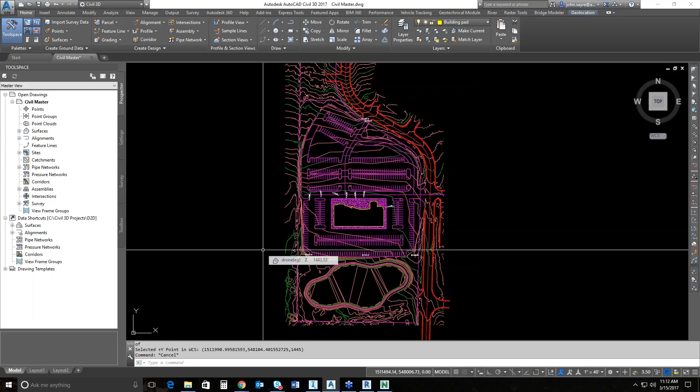So to start off, I want to tell you where you can go get this feature, because I have what's called a sit call every month for the inside folks here at Autodesk, and there were a lot of folks having problems finding this, and this kind of is how all of this got started. So I'm going to actually show you where you can get this. Everybody should be familiar with manage.autodesk.com. You would log in here with your Autodesk login.

All right, mine will be a little different. I go in a different way. So I will log in. Once you're logged in, this is where you'll be able to see all of the products that you can download, pretty much everything in the collection. But where they've got this, and I don't want to call it hidden, but where they've got this shared reference point feature located, is under product enhancements.

So it starts out here in all products and services. We're going to go to the quick link here, product enhancements. It's not just something that's going to show up in this list, okay? It's inside of a set of tools: the productivity tools for AutoCAD Civil 3D 2017. So in that set of enhancements, you not only find the Civil 3D file, but you also find the installer for Revit. You get the README, the installer for Civil 3D, and the installer for Revit.

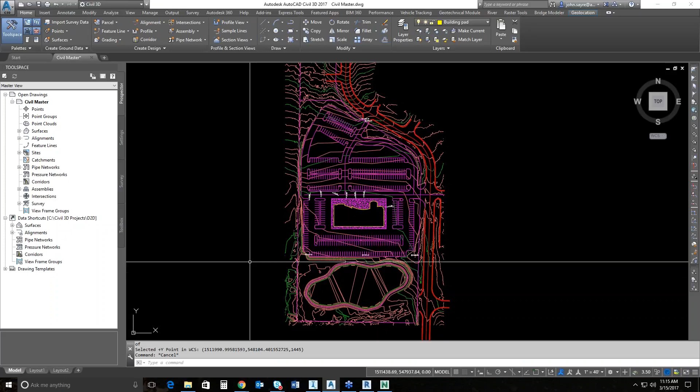So we'll go ahead and jump into Civil 3D. Just a little bit about this model. This is a model that we were actually building for this specific purpose, okay? And we were doing this actually before Eric asked me to come on and talk about this.

I was talking to him, and that's how this topic got brought up, and now we're doing the webcast on it. So we already had a lot of this done. This was actually flown with a drone for existing ground conditions capture. And so we took it through ReCap.

We brought in the point cloud, generated a surface, and then actually created a design surface on top of this so that we could marry up the Revit model to our finished design surface. So when we get to InfraWorks, we'll actually bring in the civil model itself, or the surface that you see here. This surface, if I select it, we'll bring this in, and then we'll also bring in the Revit model itself, and everything will be set up perfectly coordinates-wise.

So very first thing when we get started here, to find this command, once you've got it installed, you go to the toolbox, and under the Subscription Extension Manager, you'll see the Autodesk Shared Reference Point. Basically what this is going to do is create an XML file with your coordinates. We're going to tell it in Revit where to stick those coordinates, and then things start to match up.

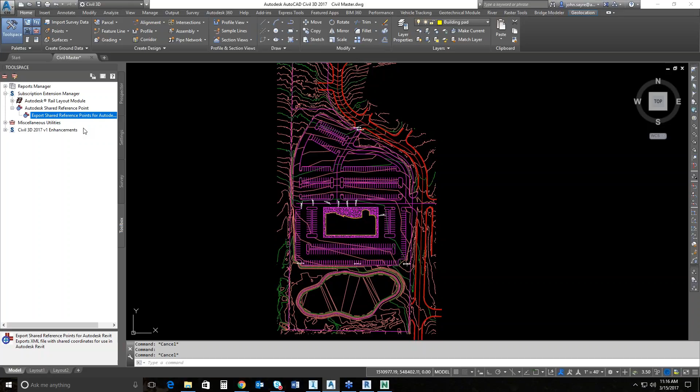So I'm just going to double-click on that command, and it asks me for an origin point. I'm going to do this a specific way today, but keep in mind how the building is oriented here on my screen. I went ahead and escaped out of that. I look at different things on the outline of the building that I can focus on in Revit. So this area here, it's pointing to the north. So when I get to Revit to actually add my shared coordinate, I can orient myself to that.

Now, one caveat here that you need to know, this outline is a polyline. It's just a polyline of the outside of the building, and if you list that polyline, it has elevation set to it. So this is the finished floor elevation that I'm going to set to my building.

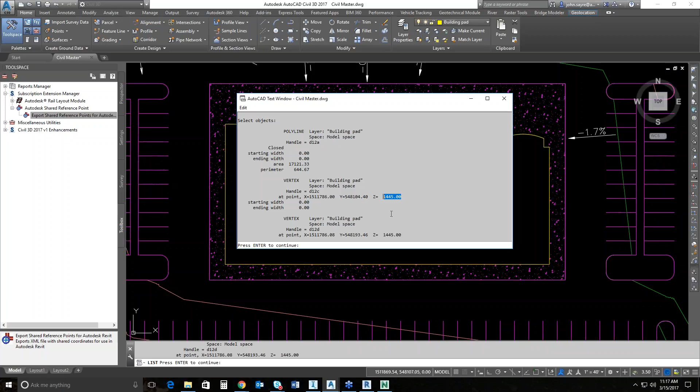Now, through several trials, I tried to add a finished floor that had multiple elevations. So meaning if I'm at 1445 on this corner, and maybe I needed to be at 1447 on this corner, I wanted to set the polyline up like that. You can't. It's got to be one elevation, as far as I can see, and I've verified that with a couple people. So it does need to be one elevation on the polyline. So I thought that was definitely warranted bringing up.

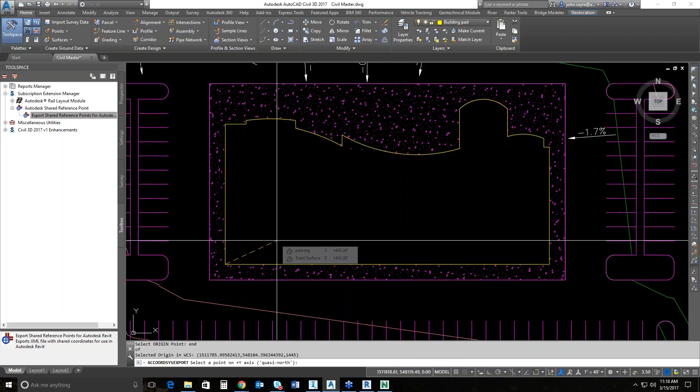So I'm going to double-click here again, and we're going to start by selecting an origin point. I'm going to pick my origin point as being this corner, and then we'll pick our next point as being this corner of the building. So keep in mind where things are oriented as to what's here on the screen. So I'm just going to select the end point, and it says to select my next point. I'm going to select here, and it brings up my units and confirm dialog.

Now, this is kind of a red flag: if this comes up and this says 0, you need to go back and set an elevation. If it comes up 0, you'll be in the right place X, Y, but you will not have the correct vertical elevation when you start to bring these things in. So the building won't come in vertically at the right location. It'll be down below wherever you're at. So be sure that it has the right elevation here.

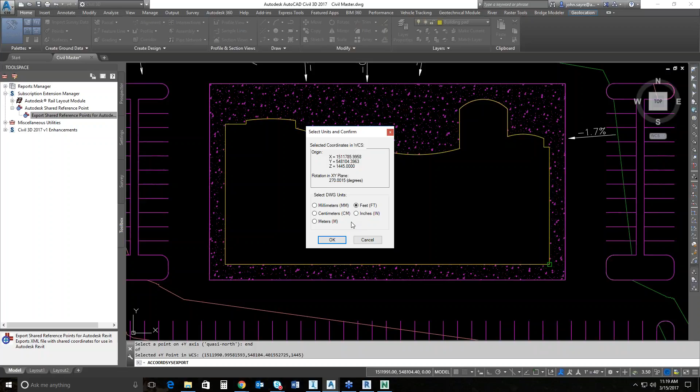We want to tell it that this is in feet, not meters, for this particular data set. And you hit OK. Once you hit OK, we're going to share this out. And I'm going to build a folder and call it shared reference point XML. And we'll save it out there. So you can name this file whatever you'd like. I'll just leave it this name and hit save.

Now, once you've done that, that's basically all you have to do in Civil 3D. We're ready to jump into Revit. So we're going to flip over here to Revit.

Now, from what I was describing earlier, this area right here is the area that's out front. So this line is how I set my shared referencing. So you can see the building's basically turned 180 degrees. So this area here needs to be rotated to where it's pointing this direction, to match up with our civil model. So don't do like I did the first time I did this. You gotta actually select it in the right direction.

And remember, we selected this going from the left to right. Well, in the Revit model, that's right to left because it's rotated 180 degrees. These are just a few little things I want to throw out as I go so that whenever you do it, hopefully it helps you from making the mistakes that I've made.

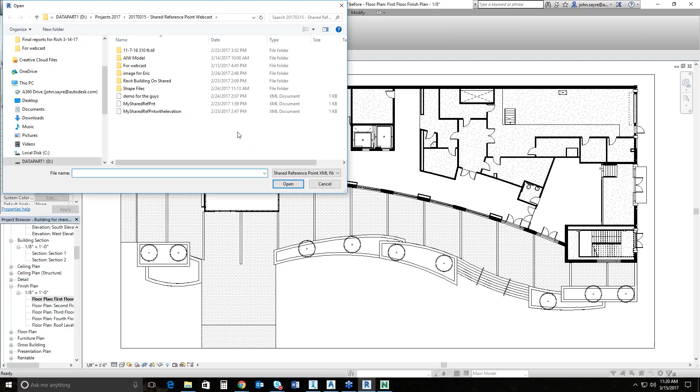Now it's asking me for the shared reference point file, and I'm going to use the one that we just got through exporting. It's in this folder. I select it and hit open. Now it's asking me to confirm, are you sure you want to create the shared coordinates? Yes. And it says I was successful.

Now, nothing happened. And this is where a lot of folks just stopped because, again, if you're an infrastructure person, you're not necessarily a Revit expert. So you're not sure about how to set orientation, how to manage views, things of that nature. So we look at the Revit model and, well, shoot, it didn't rotate. So there's a couple of extra steps. They're very straightforward and simple.

If we go to the Manage tab, this is where we can actually manage the location. So if I select Location and I look at my Site tab, you can see that there is a shared reference. This is my shared reference point. The view that it's looking at now, the definition of how it's rotated and everything, is set to that internal location. If I wanted to reference my shared reference point, then I just pick my shared reference point project location and I make it current.

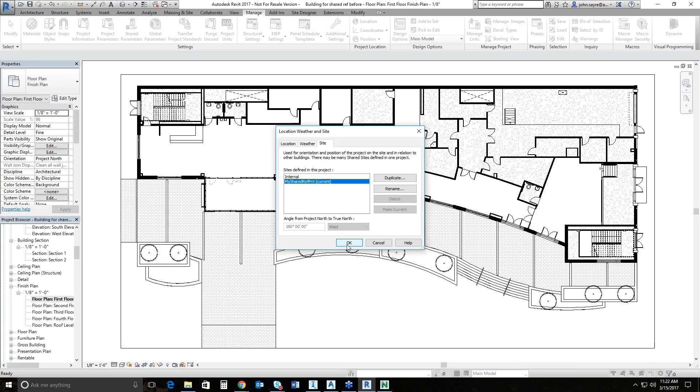And it's going to do some calculating here and it's going to make this current in this dialog. So now my project is set to my shared reference point coordinates. I hit OK. Nothing happened. There's one more step. And again, you'll get to where you do this all the time and forget this step and want to bang your head on the wall.

But if you look here on orientation in my properties dialog, it's set to Project North. Project North is the direction that Revit is wanting to look at it. So I'm going to select True North and hit Apply, and notice the building rotates. Okay, so now this Revit model is set to my correct location.

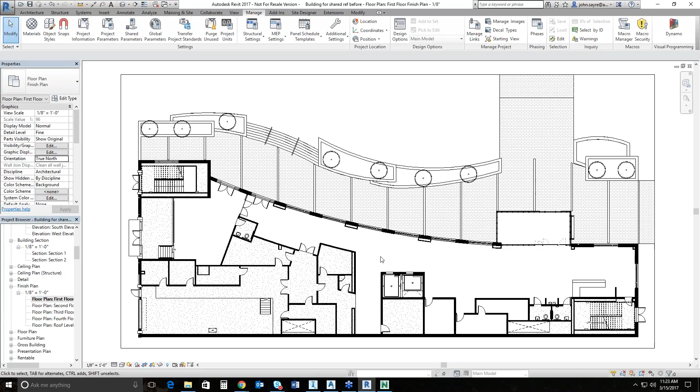Now, I want to prove it. And I'm always wanting to prove it. I had to prove it to myself, and I'm wanting to show you how you can prove it to yourself once you start doing this with your models. Basically, what I'm going to do is save this Revit model. I'm just going to do a save as, because I like to keep things separate. And I'm going to say this is my building, shared ref, webcast.

And I'll save it. So once it's saved, what I'm going to do real quick so you can see how it comes in Civil 3D is export out a 2D drawing of it. You can do that inside of Revit very quickly. If I go up to my Revit button and go down to Export and CAD Formats, I can export a DWG. One thing you need to remember when you select Export Setup, make sure it's not Honolulu, which, I don't know why it was Honolulu in this particular drawing, but it was.

You want to use the in-session export setup. And then I'm gonna look at those settings. So I can look at my units; this is set to inch, that's fine. Actually, I'm going to set it to foot, and I'm going to tell it I want it to use my shared coordinate system.

You definitely want to make sure this is set that way, because if you don't, then it's not going to come in the right location. All right? So I hit, and yeah, I'm pretty sure. I don't know why, but I'm second guessing myself on this, but I think I set this to foot earlier and it was fine. So I'm going to go to the Solids tab.

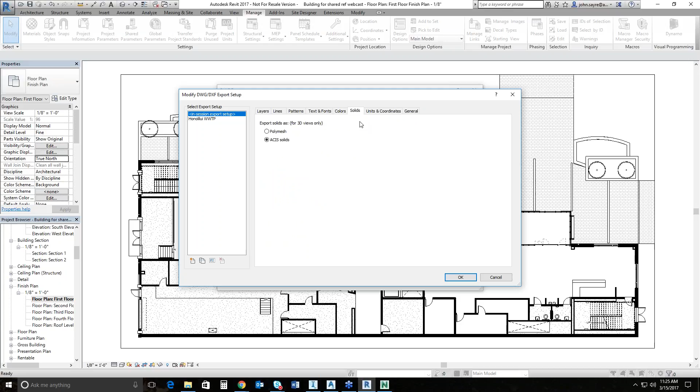The next thing you need to do so that we can export a 3D view is we want to be sure that this ACIS Solids is checked and not the Polymesh. Okay? Those are the only two tabs that we really need to worry about, and everything should come in correctly when we export. So if I hit OK, and then I hit Next, it's going to ask me where I want to put the drawing.

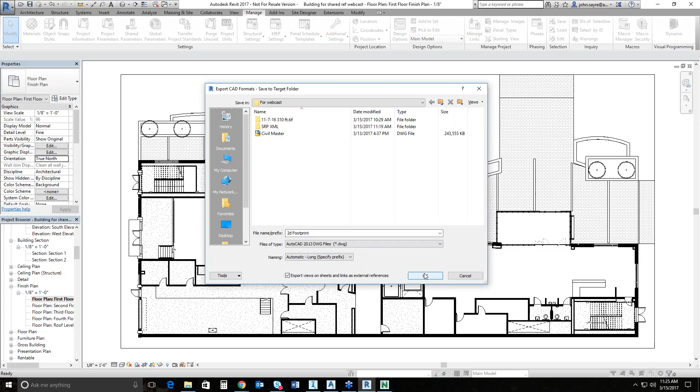I'm just going to call this 2D footprint. All right, and we'll leave everything automatic, and I will hit OK, and it will export that drawing out. And if we did everything correct, it should pop right in the exact location that it needs to. Keeping our fingers crossed here.

Quick question, so I'm John, back in Civil 3D. Yeah. So when you installed the shared reference point after you downloaded it from manage.autodesk.com, did that install it in both Civil 3D and Revit, or are those two separate downloads? They're two separate downloads. If you remember when I was pointing that out, here is where you download. There's two separate places. There's the shared reference point installer for Civil 3D, and then the shared reference point installer for Revit. Gotcha. Okay. Thank you.

This is year specific. So what I mean is this will not install on the 2016. You'll have to download the 2016 version of this, and it's out there. It's just under a different productivity pack. You'd find it in the same location that we found this. All right, good to go?

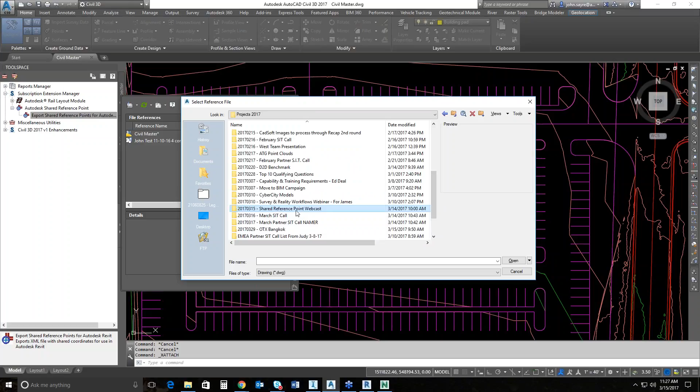Thanks, John. All right, so we have a drawing that's out there now. I'm just going to attach it as an XREF, all right? So if I get into my XREF manager and I attach that DWG that we exported, go to my D drive here, and I go to the right folder, and for Webcast, and here's my 2D footprint, okay?

I'm going to hit open, and I'm not going to select anything here. I'm going to have it come in the exact spot. I'm not going to tell it an insertion point, anything. I'm just going to hit OK, and voila. There it is, and it comes in the exact location. Now, this is a great sign. That means we actually set the coordinate system correctly, and it's in the right XY.

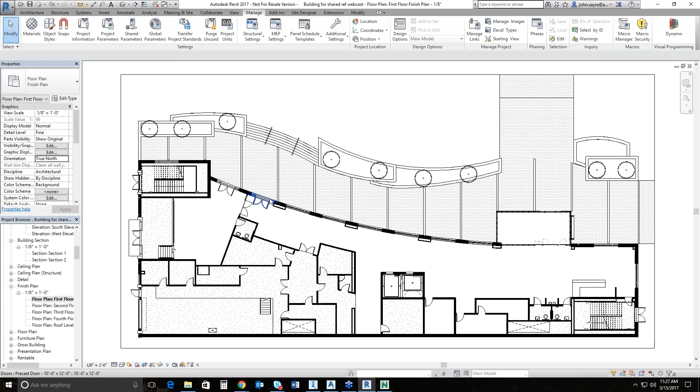We can see that, but we can't see if it's vertically in the right Z location, all right? But this is a great start. So we have a 2D export that we can start to have show up in our drawings. Let's go ahead and I'm going to remove that. I'll just detach it. And let's export one more thing here out of Revit. Let's go to a 3D model, all right?

You can see this Revit model is, I don't want to say heavy, but it is a bigger model. It's a multi-story building. There's some furniture and things of that nature in it. They've got MEP stuff inside of it. It's a good model. They built it specifically because they wanted that. They can do clash detection in Navisworks, things of that nature. So the model is a little heavier.

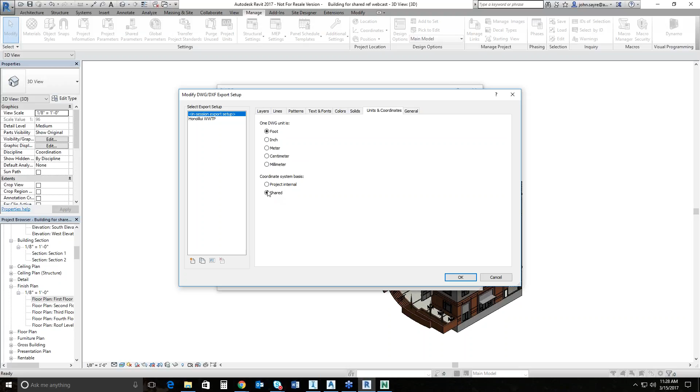But all I need to do is just go to a 3D model or a 3D view, and then I can export this out. So I can hit export, and export as a DWG. Again, and I know we just exported this out, but be sure that this in-session export is still what's selected. And I'm just going to quickly look and make sure that my units are still good. Foot and shared coordinate system, and then solids. Make sure that the ACIS solids is selected.

Then I'm going to go ahead and hit next, and it's going to ask me what I want to save. So I'm going to call this a 3D footprint, and hit OK, and it'll export that out. Now, it does take just a second to export it. The 3D model is a little bit heavier, a little bit bigger drawing whenever it exports. You will be able to see it 2D, so you could just export a 3D model, and it could maybe work for everything you're wanting to do.

I like the 2D model also because it's a smaller file that you're XREFing in, and we all know the lighter the files, the better things work. Get into an 80 meg drawing or an 80 meg Revit file and try to bring that in, you're going to be able to do it, but it's going to slow things down sometimes. It does take just a second to export.

One thing when I was doing this and setting all of this up, you notice down there in the lower left-hand corner, it's stuck at 36%. That's normal with this particular model. If it hangs for just a second, it's still thinking. You just got to let it go through its paces here.

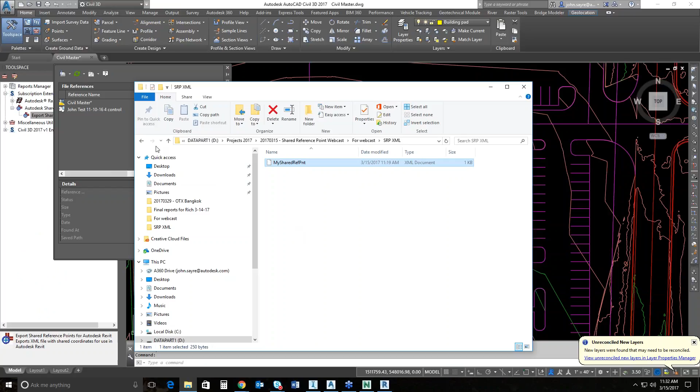All right, so we've exported our 3D model. Now I'm going to get back into Civil 3D, and remember I said something about it being a little bit of a heavier file, a bigger file. You can see that 3D footprint's 40 meg, and the 2D footprint was 272 kilobytes. So that's why I say, pick your poison - it's totally up to you which one of these you use. Sometimes we want to see that stuff in 3D in context inside of Civil 3D. It definitely helps you tell a story. So I wanted to show that you could do it.

So let's attach it. We will attach that DWG. I'll pick that 3D footprint, and I'll just hit OK. It's going to take a second to bring it in. And if we did things correctly, it should pop right in at the right location. I can tell you my processors are running wild, so we know that things are happening.

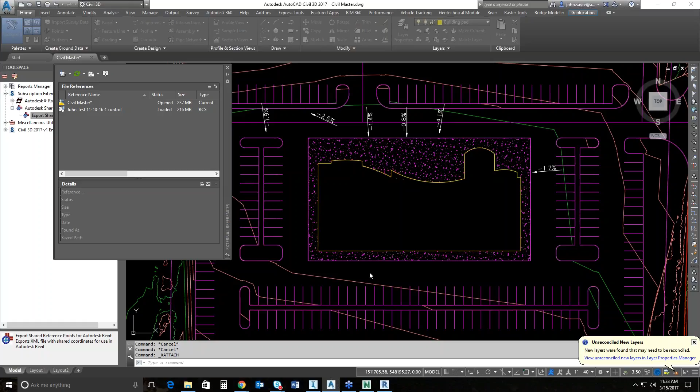When you're using the bigger models like this, I can't stress enough that you do need to try and stay patient. So there's your model. Now notice what it did do, and this is again why it's a little bit heavier of a DWG that it exports - you can see all of the information inside the building. This is for multiple floors, so that's why it's that much bigger.

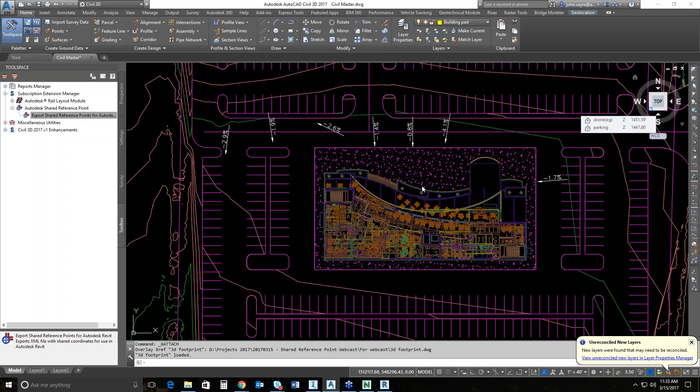Okay, so if I turn this on its edge and look at it in 3D now, it's going to take just a second. Once it gets to the initial view, it moves pretty good. Here we go, getting there. Should turn it on its side here. And we'll be able to see the 3D building, and there it is. You can see it right there, and you can see my surface.

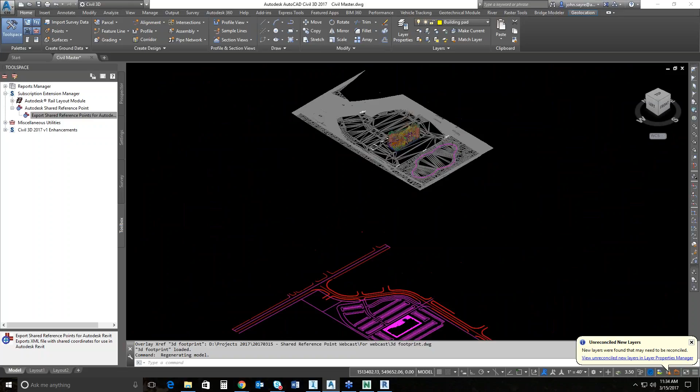It's regenerating here. There we go. So I can zoom in, and you can see that Revit model. So I'm trying to rotate it here. It's taking just a second. This is a very heavy Revit model, so that's why it's taking a little longer to react, but you can see I'm turning it pretty easily.

Once it's set, you can change your view style, your visualization style, and look at it any way you want. So it's looking at 2D wireframe. We can do realistic or conceptual. Let's just do conceptual, see what that looks like. But you get the picture. You can look at this in a 3D context inside of Civil 3D and actually see that footprint of the building.

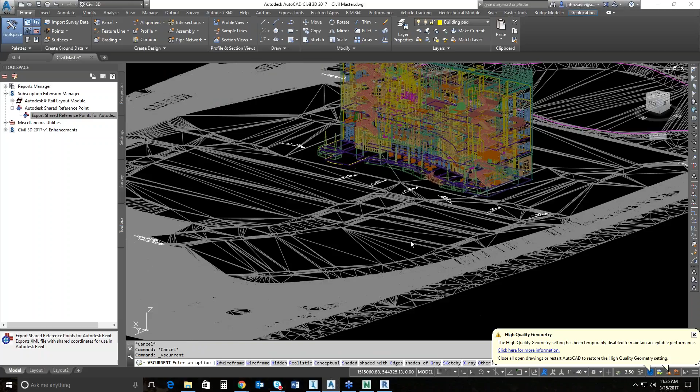Which I hope you agree with me, the steps to get to this point are very minimal. And that's why I was so happy to be able to bring this to you. So you can see everything looks great. All right.

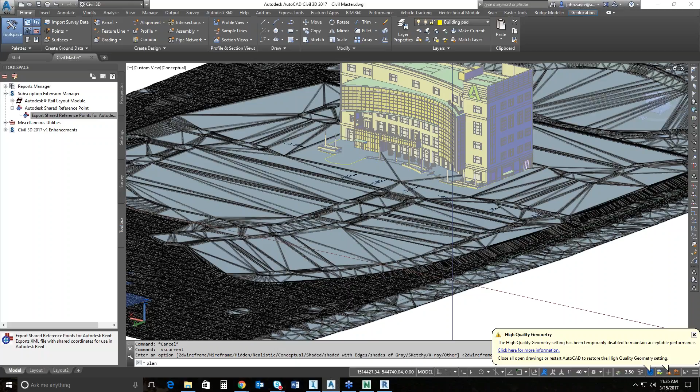So let's go back to our plan view. I'm going to take it just a second. All right, so I have this exported as DWGs. Let's do this. Let's go back into Revit. We want to talk about how we can get it into NavisWorks. So let's do this.

We already have what we need to get it into NavisWorks, but I can actually export out an NWC. This saves this scene as an NWC. So let's do that real quick and show you how we can start to look at this in Navis.

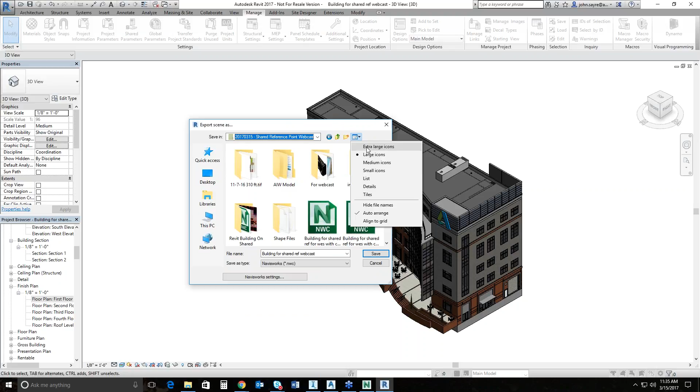So I'm going to go back one folder. Of course, my views are not the way I like them. And export this to my For webcast folder. So we'll just call this Revit Model. All right, and I'll hit Save. And it exports out that NWC. Okay?

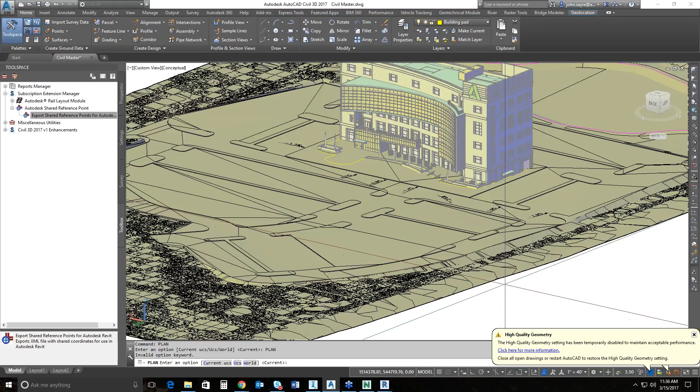While that's exporting, I can go back here to Civil 3D, and I needed to hit Enter one more time. And it should go back to my real world. Go back to a 2D wireframe, and everything should be good to go. I'm going to go ahead and I can leave that right there for right now.

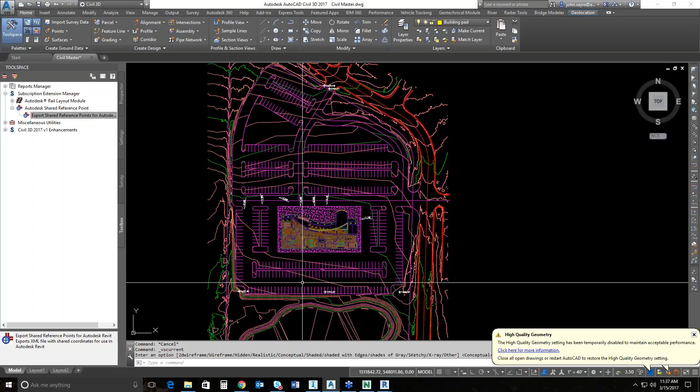Now, I'm sure there's a question about, well, what happens if the Revit model updates? You do have to, if they update the Revit model inside of Revit and it's on the shared coordinate, all they need to do in order for you to bring this back into Civil 3D is just export another 3D file. And then you can XREF the building right in. It looks exactly like what their edits would show. There's not a direct link to get that and make that happen automatically. You would have to re-export that.

So we should be getting really close. Yep, it's getting close. John, there was another question I'll throw at you if you want to take it.

A couple of people ask about the building site object and the ADSK format as a way of going between Revit and Civil 3D. Is there an advantage to doing the DWG export over that? I believe there is, because the file is, number one, I think it's more stable. The ADSK format, that was how we did it before we had shared reference point. So I think you definitely benefit from doing it the way that I've just shown over the ADSK format. Now, that's not to say that methodology doesn't work. I'm just saying this is much smoother. Does that help? Yeah, that's what we're looking for.

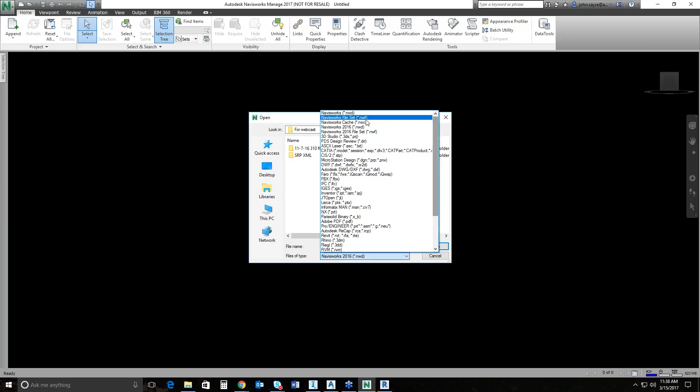Thanks. All right, so we're in Navisworks. I'm just going to open that file, that NWC that we just exported. And let me find NWC, John, not NWF. And I'll pick that Revit model, and it'll open up my Revit model.

Now, you're going to see some numbers here on the model itself. That's stuff that came exported from Revit. That's okay, you can turn that information off. But I can see my building as it looks in Revit right now.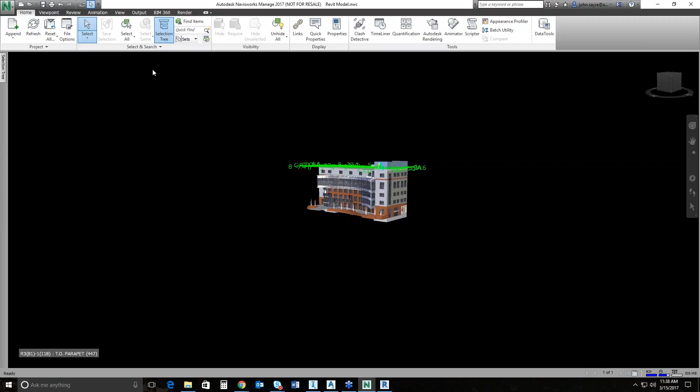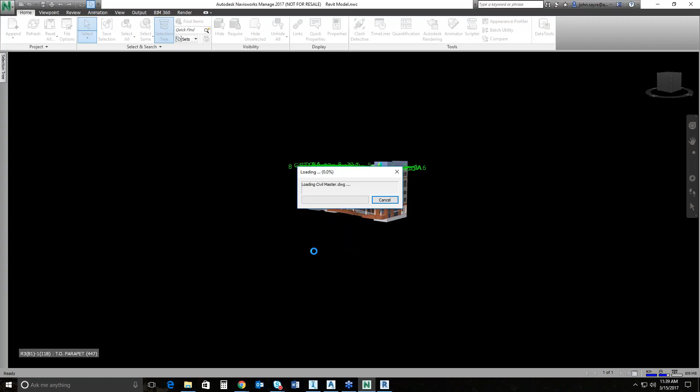Now, to get my civil model in, I can just append that DWG. So if I go back and set my file type to DWG, and I always have to scroll down, I apologize. Autodesk DWG. And I pick that civil master and hit open. It's going to bring in that civil master. It's going to take just a second, just because it's a large file due to the surface that was generated from the point cloud. So we'll let it go ahead and churn on that.

And while it's doing that, we're going to jump into InfraWorks. I hope I'm not jumping around on the products too much, but there's no reason for us to sit and watch this come in. We'll come back to it in just a second. But this is all you have to do, is just add this to it, and we'll have everything inside of NavisWorks the same as we do Revit and Civil 3D. So I'm going to jump to InfraWorks, and we're going to start this from scratch.

Okay, I'm going to build a model in Model Builder. I thought about using an existing model that I had already done, but I want you to see that this is all it takes to build.

This particular project is at 63 Truman Road, Marshfield, Missouri. If you didn't know, I live in Missouri. I don't live in Marshfield, it's about 50 miles away from me.

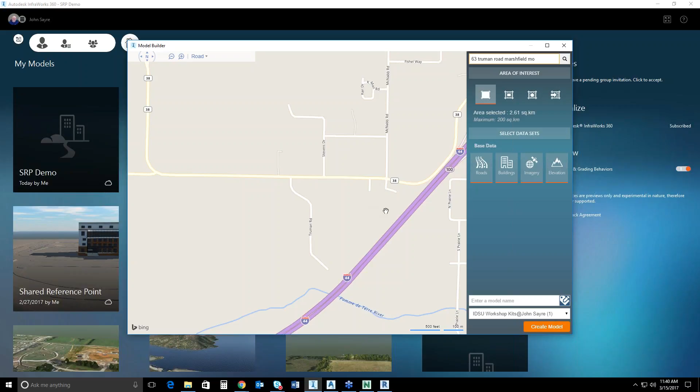I need to be able to see where I'm at, so I'm going to turn that angle view off. And this particular project lies right here. Okay, this is the project right here.

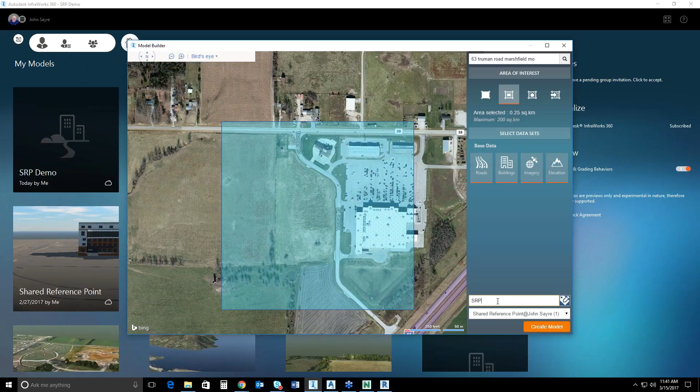I'm going to go ahead and generate a model with that area right there. I'll go ahead and pull all of that, doesn't matter. And I'll change my folder online. It's going to go to a shared reference point, and we'll call this SRP Webcast.

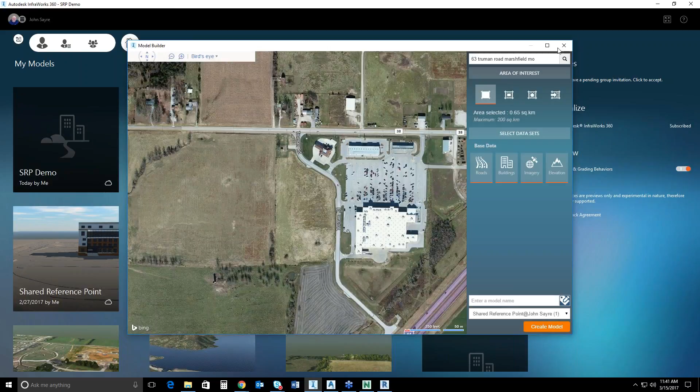And hit Create Model. Now it's only going to take maybe a minute, two minutes for that model to come back. We just get better and better response times from Model Builder. Once it's here, we'll go ahead and open it, and we'll be good to go.

We can go back here to Revit, or I'm sorry, to NavisWorks. It's still chewing on it, still thinking about it. It will come up. Just a little bit of background as to what it's doing - that drawing file is 260 meg, so it's not a small file. It's a pretty large file, so it does take it just a second to come into Navis. Once it's in, you're able to navigate around very easily.

So we've already got our model back here in InfraWorks. I'll go ahead and select it, and it'll open. Once it opens up, then we'll go ahead and attach a couple things, and I'll show you how that works.

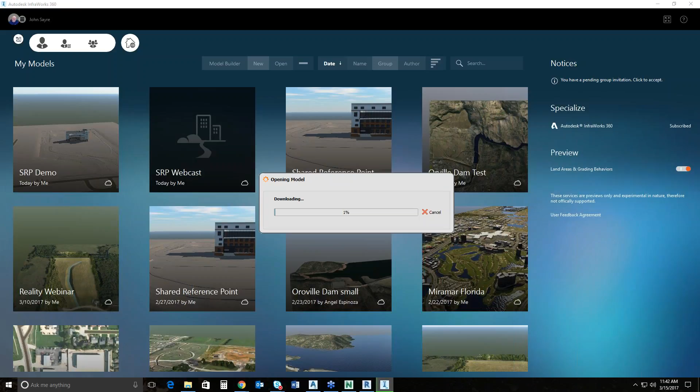There's a setting that I need to show you inside of InfraWorks that needs to be set before we start to bring this information in. You're able to actually attach a Revit model, and it pushes that coordinate system information up to the cloud and then orients it in the cloud. That piece for right now is not functioning exactly right - they're working on fixing that.

So whenever we bring this in, it can read the coordinate and the placement using the NavisWorks engine. So I'm going to show you where that's at once this model opens up. There it is, all right.

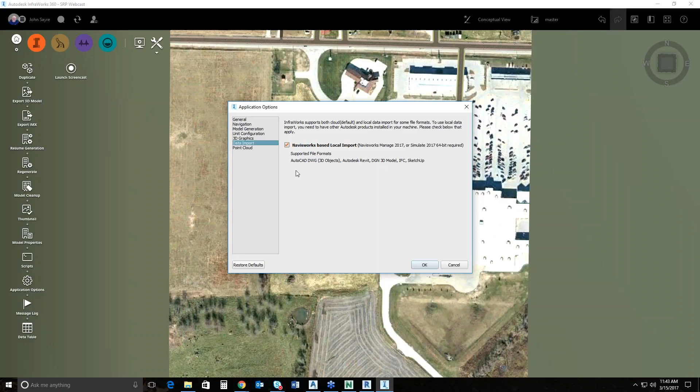First things first, we need to look at that setting. I'm going to select on my settings button up here and go to application options, and under data import, you need to make sure that this NavisWorks based local import is selected. Now you will need to have NavisWorks installed, all right, to be able to utilize this. So just be sure that you do have NavisWorks installed, and it should come in just fine. We'll go ahead and hit OK.

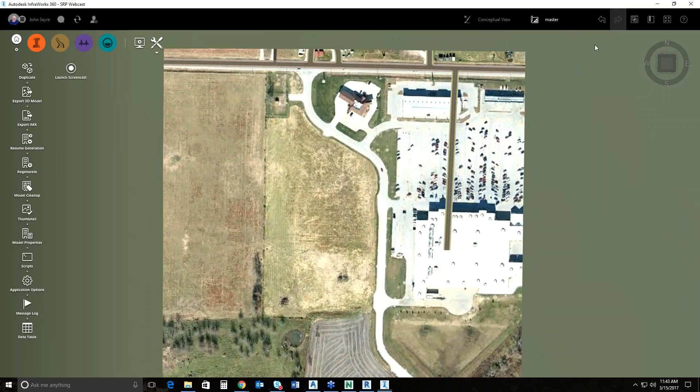We're good to go. Now, a couple things - I always go ahead and build myself a new proposal, and this proposal I'm just going to call it civil data. So this will be my surface that I bring in. I'm going to hit OK, and it generates me a new proposal.

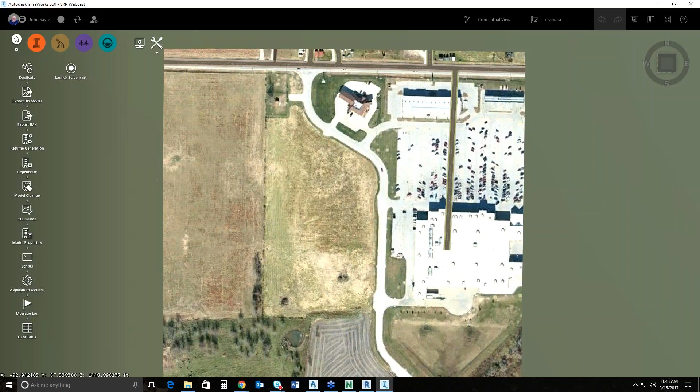Now, so you can see this surface better, I'm going to do this. I'm going to get rid of my raster image, okay, because I've got another image I can actually place on it afterwards that'll be better. That's something that I collected when I generated things with the drone.

So I'm just going to go back up and select that I want to bring in information from a Civil 3D drawing, okay? And again, this does take it a second because it is such a big file. It does take it a second to open this. I'll go ahead and open it.

It's going to connect me to those data sources, and this is how I'm going to bring my surface in from Civil 3D. Now, this is actually going to be a little bit of a test because I have not had the DWG open at the same time I was trying to connect to it. So we may have to reconnect if it doesn't show us the information.

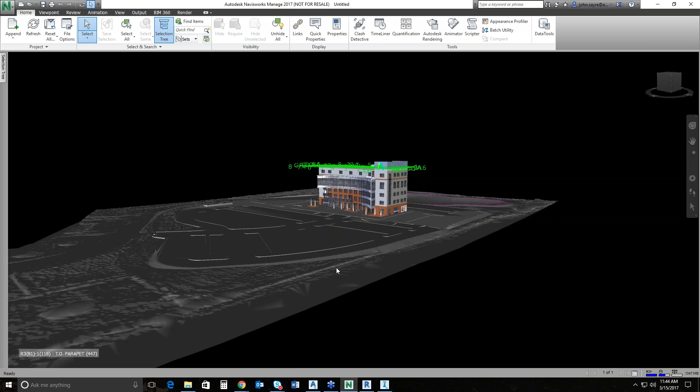So let's jump back to NavisWorks while this is connecting. And you can see in NavisWorks how my model came in and looks - I think it looks great. So everything's married up. If we had utilities, I mean, we could start doing clash detection, things of that nature inside of Navis. You could do timelining.

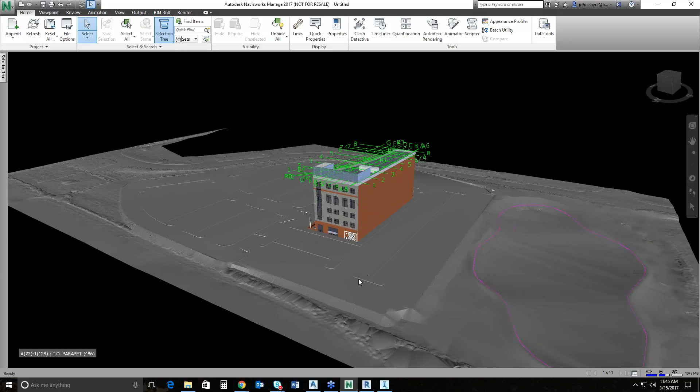There's all kinds of things you could do, and a contractor would definitely love the fact that you had all of this coordinate system stuff already fixed for them. We're not physically moving a building around on the site, it's in the right location. And being able to attach that DWG so we can look at our surface and everything - this is the engineering model, this is the site model with everything in it. So that's three products that we've shared across.

Let's look at InfraWorks here. It's still thinking, it'll take just a second. We're doing okay on time, Eric. I think we're going to be okay.

Before I show you, just a little FYI on how I generated this existing surface. We're talking about shared reference point today, but the way I collected the data for this existing ground surface was with a drone. We flew this site using two drones, a 3DR drone and a DJI drone, and pushed that data through Recap 360. Once it was in Recap 360, it generated a couple of files for us - we have a georeference TIFF, and in this folder we have the RCM and RCS files.

The RCM is a mesh file, the RCS file is the point cloud. So inside InfraWorks 360, we'll be able to drop that point cloud, and you'll be able to see the point cloud itself of the existing conditions.

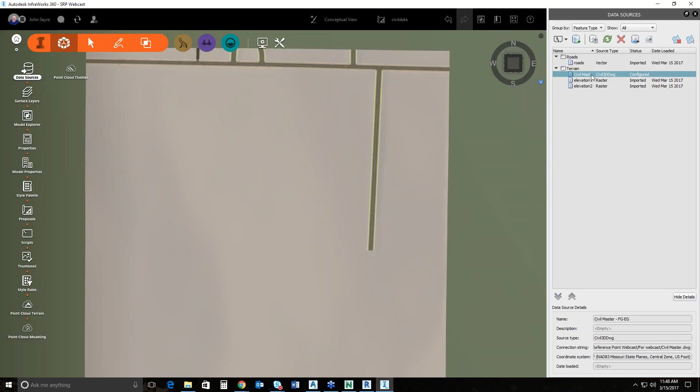Gotcha. So once we've attached to this data source, I'm going to turn off these other surfaces and just bring in the one - that's my FGEG, hit OK. Nothing happens, so I need to go back in and actually set my geolocation, making sure it's on the coordinate system I'm working with. So that's MO83CF. I hit close and refresh, and it's going to bring in that civil model, and you should be able to see the parking and things of that nature. Then we'll be ready to bring in our Revit model.

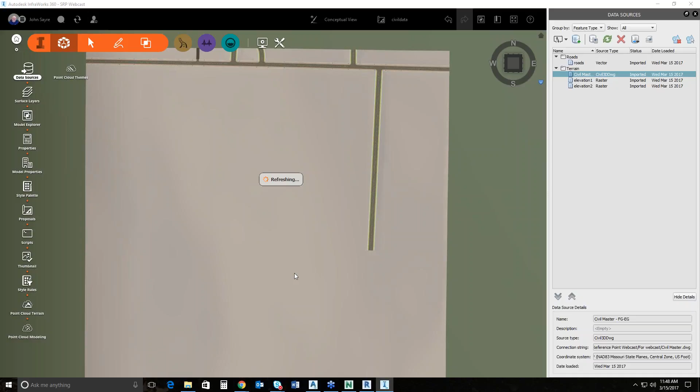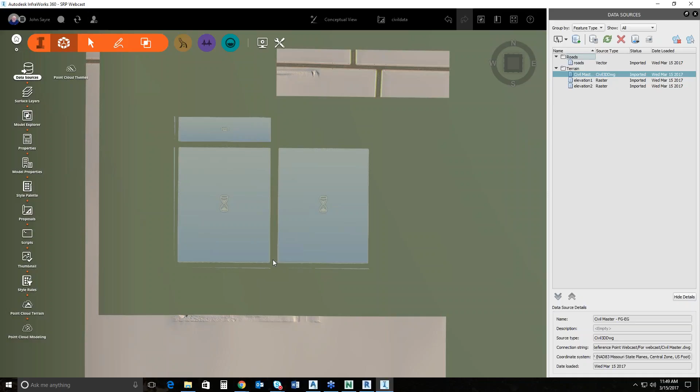Once it refreshes, it did take a little bit the first time. I might have picked a smaller data set, but I wanted to show everybody this isn't just a small data set - there were millions of points, this point cloud had close to 25 million points. That's what the surface was generated from. I did shrink the amount of data by reducing the number of points when I generated the surface in Civil 3D, but you're still looking at a surface with well over 500,000 points, so it does take a little bit to populate.

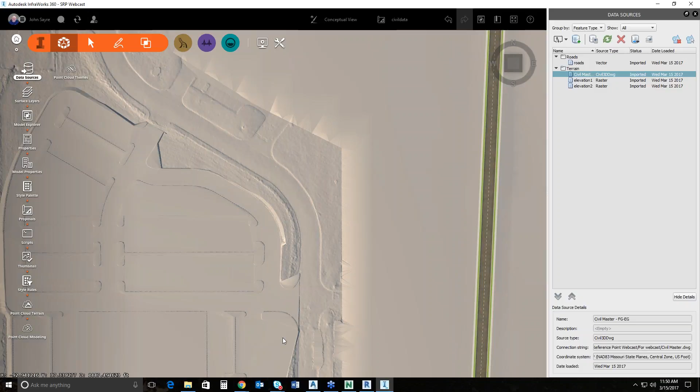Once it comes in, we'll be able to move, scroll, do whatever we want. You can see here, I'll zoom in on this while it's still regenerating. This information here, this was all from the drone surface - so you get this level of detail with the drone surface that was generated in Recap. I think that tells the story.

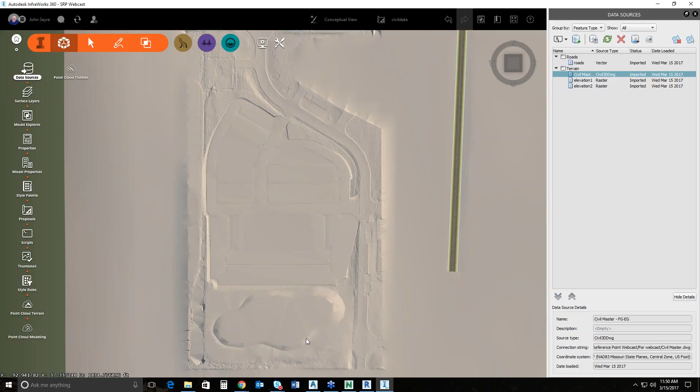The other story that I would tell on that front is it took 10 minutes to fly this, all right? 10 minutes, I had all the data that I needed to push into Recap, and then it took about 3 hours to get the cloud back from Recap 360. So you have that level of detail. These are semi-trucks, by the way. But you have that level of detail that quickly, all right?

And doing a traditional survey on something like this might take a little bit longer. So that's a whole other conversation. We'll leave that for another day. But you can see here, I've got all of my parking, things of that nature.

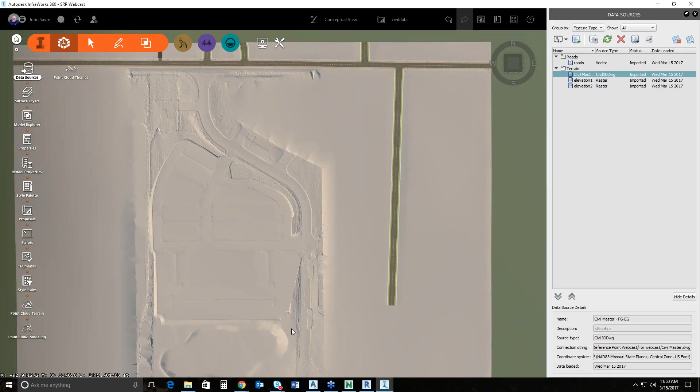All right. So now I need to bring in my Revit model. I'm going to go up and select Autodesk Revit, and I'll select that Revit model. Now the Revit model I'm going to use is the one that we saved out. I am going to save it, and I'm going to close it. And we should be good to go. And then I will select that Revit model right there and hit open.

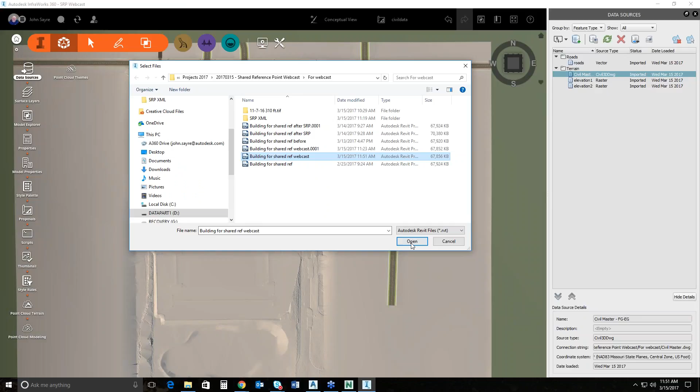Now it is going to take just a second to connect to this too, because again, you saw that was a 70 meg Revit file. It's a bigger file, so it does take it just a second to connect. Once it connects, it'll be two clicks, and it will place itself right where it needs to.

John, we do have Eric, do you have any other questions while we're waiting? I do, in fact. A couple of people are interested in more detail on the drone hardware that was used to gather the data. Okay, again, we used a 3DR drone with the Sony camera, and we also used the DJI Phantom 4 Pro. Those were the drones of choice for this particular project. I don't know if I've got the photos in this folder or not. I don't. But I think there were around 140 images for both drones. But both of those do a very nice job.

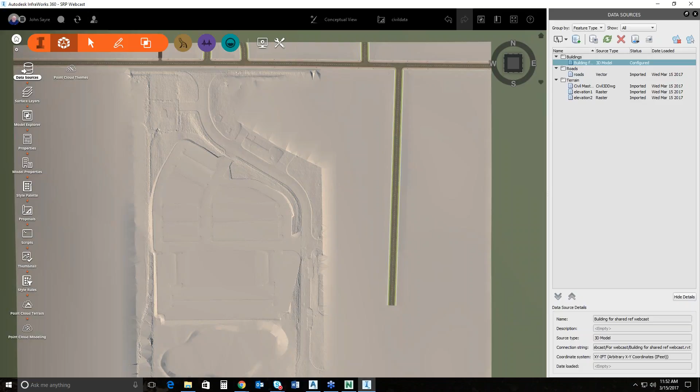We did have some control points that we set, so I hesitated there to tell you that, Eric, but we do have a very good level of accuracy versus traditional survey. We're down within 3 inches of what's there. That's always a question that folks ask: hey, what's the level of accuracy on something like that? And that's the level of accuracy.

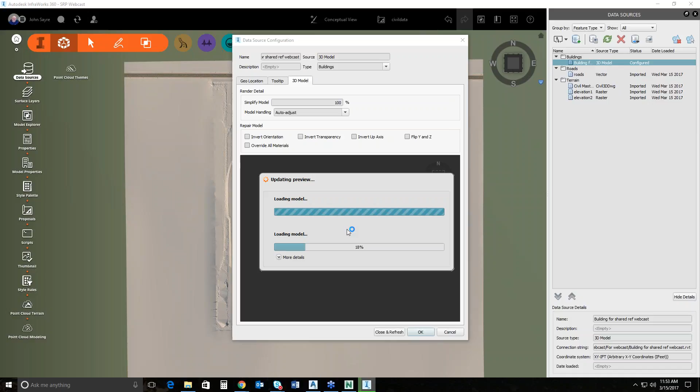All right, so got about 7 minutes. I've got to go ahead and configure this 3D model, and this is all it takes to configure it: set the coordinate system. That's it. So it's the same coordinate system, MO83-CF. If I look at my 3D model tab, it'll generate that model in a preview so that you can see that you're getting everything that you want.

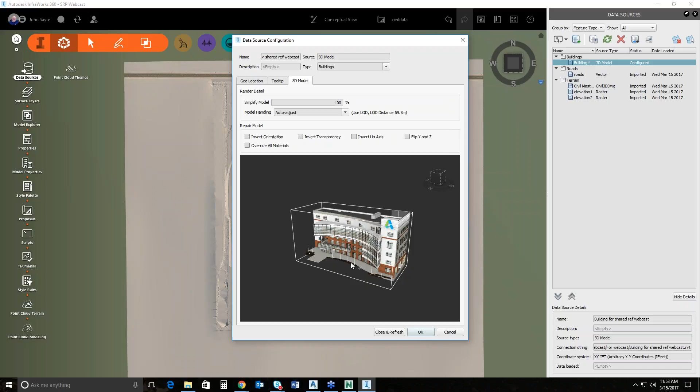Definitely do this, because sometimes the 3D models come in and if they're messed up coordinate-wise, they might be off in a distance somewhere, or it may not be showing the right textures. Just preview your model. It takes just a second, and then you can be sure that you're bringing in what you need. So after I set my coordinate system, I hit close and refresh, and if we keep our fingers crossed, we should have our model. And it brings that model in pretty quickly.

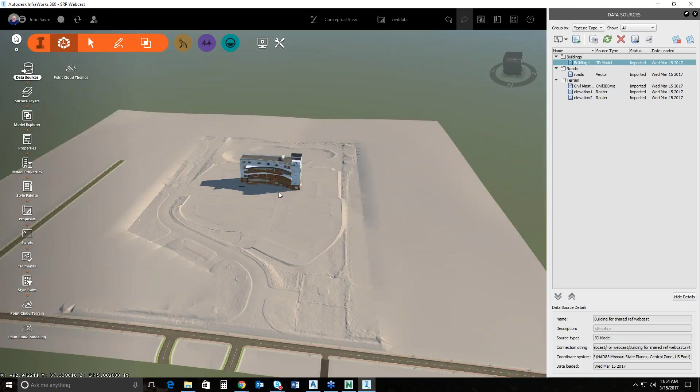So there it is. Notice we can already see shadows, and we can see that we have our model placed correctly. Now, the way you had to do this in the past was bring it in and move it up and down, move it around manually. Now you can still do that. I can still grab it and move it around if I want, but it should be in the right location and the right elevation, so you can start to create a visualization piece, or make other design decisions right here in InfraWorks 360.

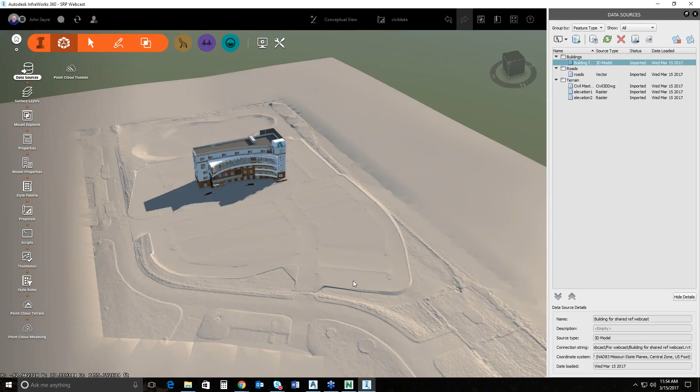So you saw everything happen right here in front of you. I'm going to show you a finished model that I did. Actually, you know what? I got one other thing I want to show, Eric. Let me spin this around in the right direction. I was talking about the georeference TIFF that we had, okay?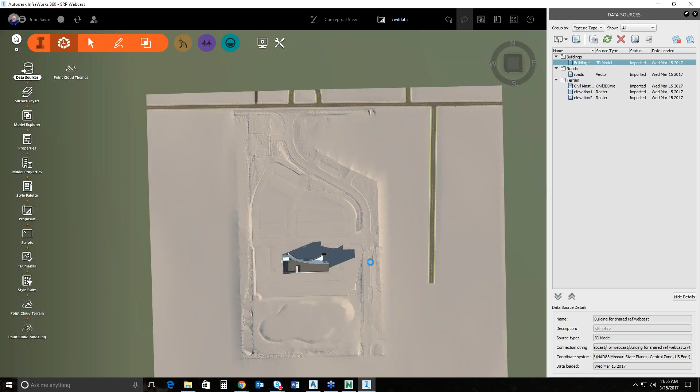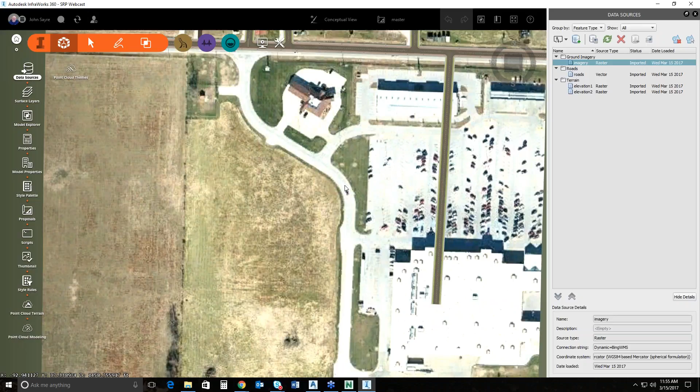And I'm gonna jump back to the master, and you'll be able to see the Bing image that came in, all right? And you can see the level of detail. Not very good, okay? I'm going to do this. I'm just going to bring in on top of this image my georeferenced TIFF that we got from ReCap 360 so you can see the difference, all right?

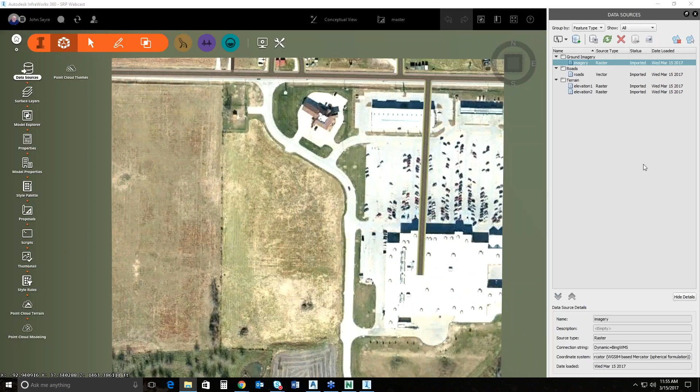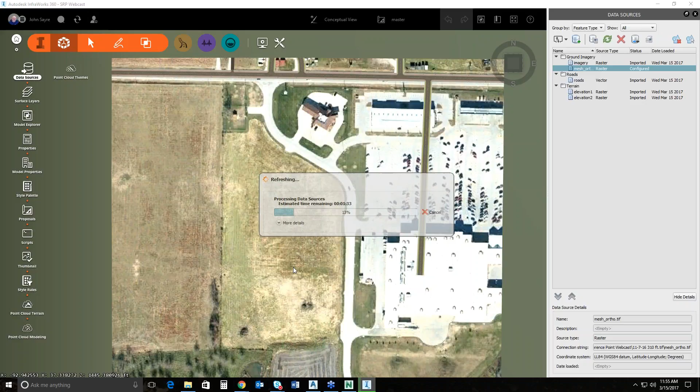And if I go back here to my TIFF, all I have to do is just drag that and drop it on the screen. And you don't have to do anything here. You just hit close and refresh, and that image will come in. It does take it about a minute, and then we're going to do one other thing to it so that you can see how it meshes with the other image once it comes in.

But you're going to see the benefit of having this particular image, period. Okay? This is a real-world, what's out there today image, not from Bing, not from Google Earth, not from Google, not from a GIS store. This is what's there the day that we flew it. So if we flew it today, this image would represent what is out there right now. All right, it's almost there.

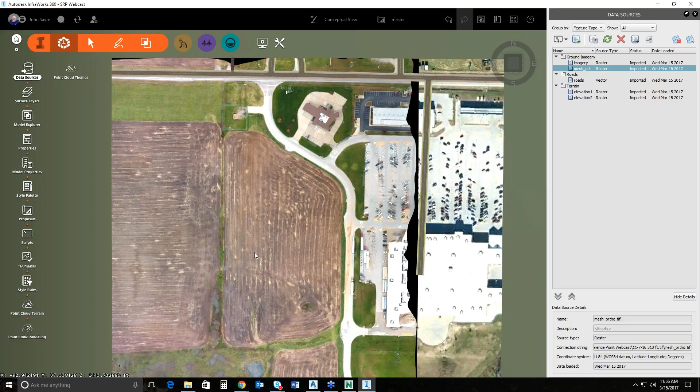Fingers crossed. John, a question about how did you get the point cloud down to natural ground? I set control points in the field when we shot it. And ReCap 360 takes those GCPs and the information that's embedded on the photos, meaning the geolocation of the images, and it meshes them together, and that's how it corrects itself to the real world.

Did you use ReCap to remove vertical features, poles, trees, etc.? I did not, but you can. You absolutely can. You can actually neck that stuff down. When I say neck it down, you can get rid of some of those features here inside of InfraWorks 360 also. Again, we got 3 minutes. That's a whole other topic.

Gotcha. And I'd be more than willing to talk about it some other time also. Maybe on a future webcast. What do you think? I'd be glad to have you back.

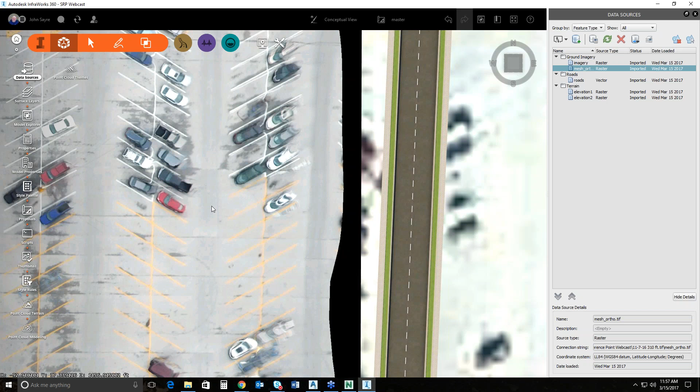All right. So this is what's there today. Now I want to show you the difference in quality of photo. These are the cars in the parking stripes. This Walmart over here. That's what Bing gives us. This is what we have from the drone. I can zoom in here, and I can almost see what's on the dash in their car.

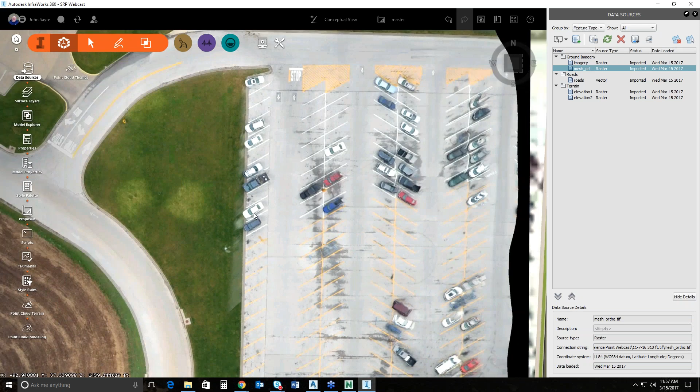Okay. I can definitely see where the curb inlet locations are. I can see building information. If I remember right, there was one, oh, right here. There's something in this guy's front seat, okay? You can't see that stuff on the Bing images. You can see landscaping. You can see all kinds of stuff. This is what is there today, all right?

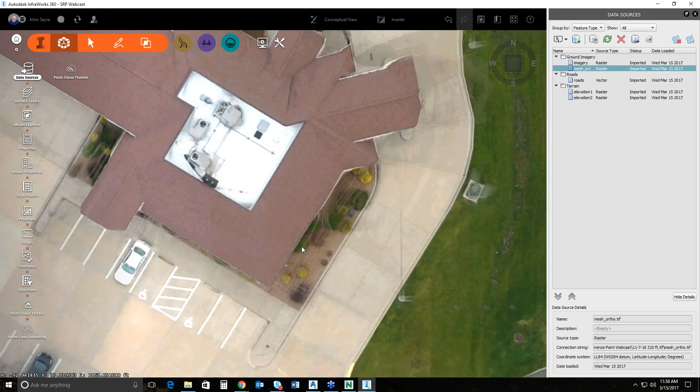And you get this information from ReCap whenever you push out your model or use the photogrammetry to generate the model. So we got 2 minutes here, Eric. I could go for another hour if you'd like, but this definitely tells a story. I know I got off a little bit on the way I captured this information with the drone, but I think it was definitely key here.

The shared reference point, folks, use it. It's there. It works. It works very well, and you're able to bring this information back and forth between Revit to Civil 3D, to Navisworks, to InfraWorks, very, very seamless. So I think that's what I wanted to show you today.